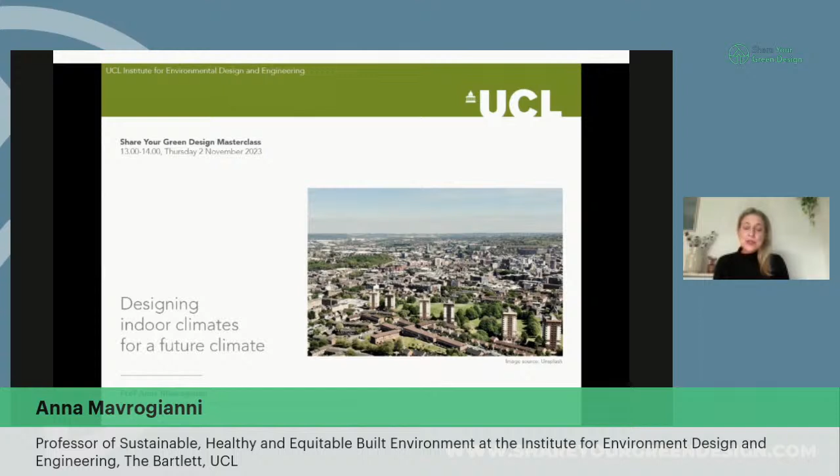So what I'd like to talk about today is how do we optimize our designs of indoor climates for a future climate in the context of the climate crisis, but also increased awareness about the health and well-being impacts of indoor air pollution. So next slide, please.

Thank you. So as many of our listeners probably know, there is growing concern about the negative impacts of both indoor overheating and poor air quality in buildings across building stocks around the world, including in temperate climates such as the UK. So it is a nationwide growing problem that can have adverse effects for health, well-being, comfort, productivity, and in particular with regards to overheating, it can render buildings uninhabitable during summer months.

It affects different actors in society. It affects the construction industry, building designers, retrofit providers, contractors, businesses. It can cause a lot of disruption in terms of how habitable the indoor environments are and how several businesses operate. Social housing stocks might be particularly affected, social landlords. Of course, it poses a significant burden on the health and social care sector, which, as we know, are already negatively affected post-COVID-19 pandemic. It also has impacts for building owners, occupiers, renters, and most importantly, it will affect disproportionately the most vulnerable in society.

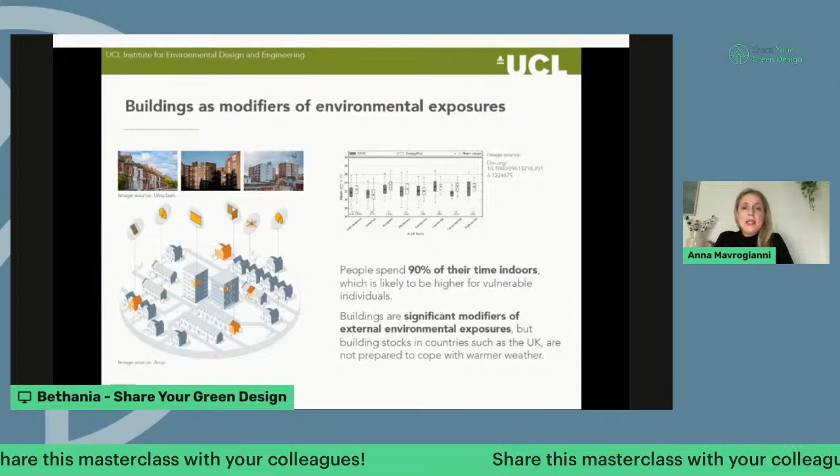So why do we care about indoor environments? Well, it is estimated that in climates such as the UK, temperate or heating-dominated climates, people spend 90% of their time indoors. So quite a significant part of our day is spent within homes, workplaces, learning environments, retail spaces, etc. And this is likely to be much higher for vulnerable individuals, people who have a limited mobility, for example,

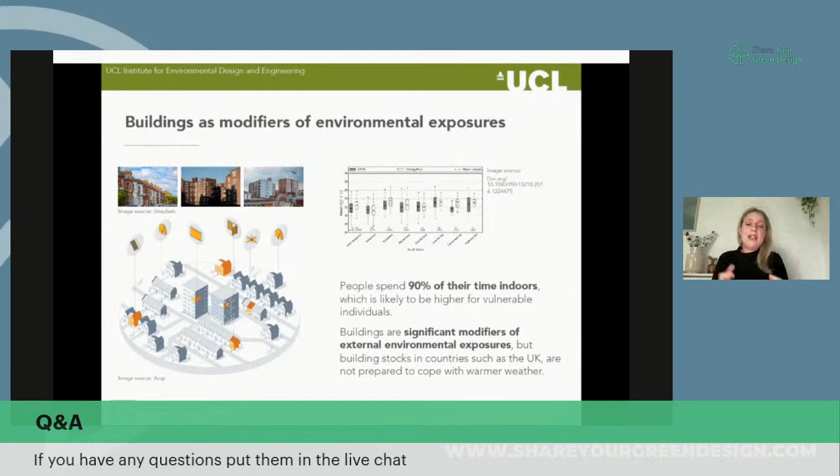or are socially isolated. And what we do know, as the diagram at the top shows, is that every building envelope will modify exposures to a series of environmental variables: temperature, humidity, air pollution, light, etc. So building envelopes function as filters, if you like, as modifiers of those environmental exposures. And then on the other hand, we also have a series of environmental quality factors, such as heat or internal heat gains or air pollutants generated indoors. So a lot of the work we do is about really the balance between internally generated and externally generated environmental factors, and how the buildings act as modifiers of the associated exposures.

Importantly, building stocks in countries such as the UK are not prepared to cope with warmer weather, so they have essentially been designed for a fixed climate, for very different climatic conditions, and in many ways are maladapted to warmer weather. And of course, this is very problematic because, as we know, our climate is changing and they need to be resilient for a wide range of climatic conditions, whilst at the same time promoting high indoor environmental quality, so low levels of indoor air pollutants, sufficient access to daylight, etc.

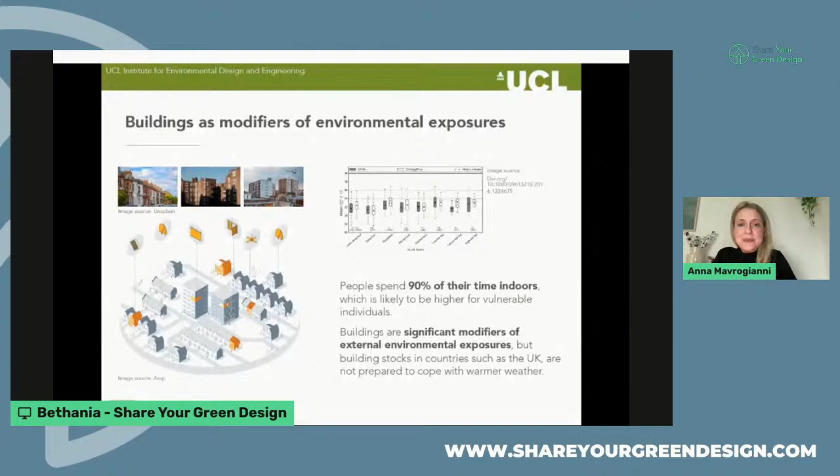So why is this important? So this is a paper led by my colleague, Dr. Giorgos Petrou, that we published a while ago in the BMJ on net zero current energy efficiency targets and what this means for indoor air. And this paper really highlights the need we have to monitor indoor air, to understand a little bit more what those existing net zero targets mean for our indoor environments.

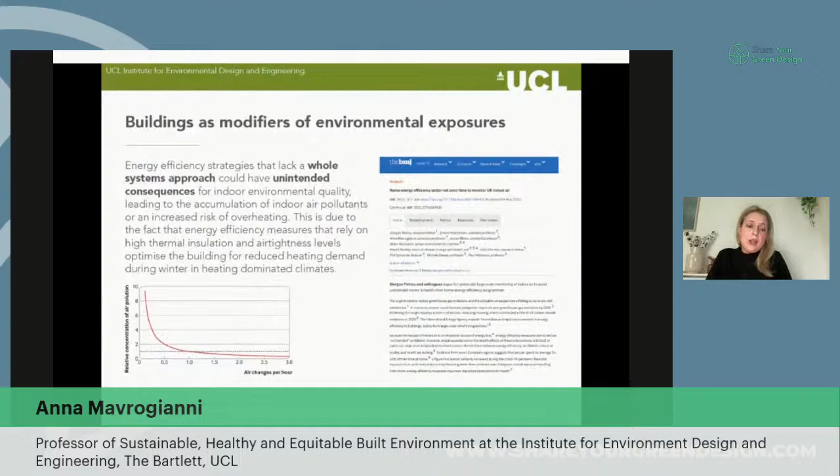So I would like to clarify that there is an imperative to reduce the space heating needs and associated carbon emissions from our building stock in a heating-dominated climate such as the UK and elsewhere. And this is absolutely fundamental in the context of climate change mitigation strategies. However, single-focus policies can have unintended consequences. So energy efficiency strategies that don't adopt a whole systems approach can be detrimental for indoor environmental quality.

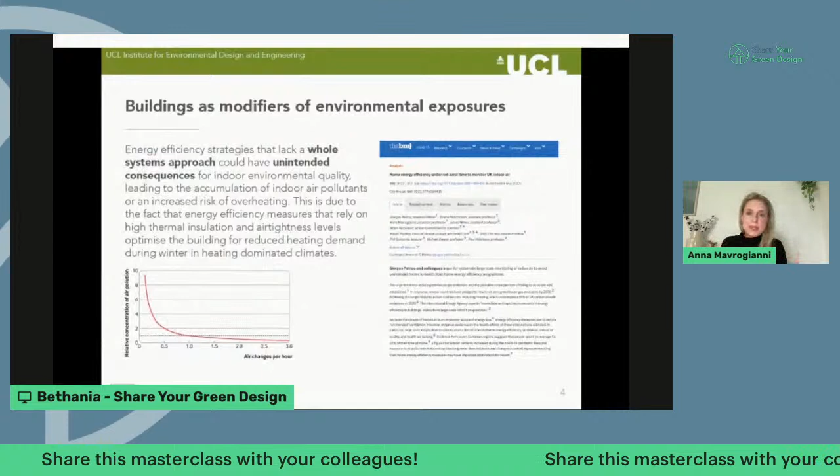And an example of this is increasing the building fabric airtightness or insulation levels of building stocks without simultaneously thinking about ventilation rates, strategies, or summer thermal performance, passive cooling strategies, and so on. So energy efficiency measures, trying to achieve those net zero targets by relying on high thermal insulation and airtightness levels, but without thinking about year-round performance or indoor air quality, can be quite problematic.

And the diagram at the bottom visually illustrates the relationship between air changes in a building and pollutant concentration indoors. And I think the issue there is that previously we had quite a leaky and not very airtight building stock, we had those unintended air change pathways. So indoor air quality relied in some ways on those unintended air change pathways, but these will be diminished as we make our buildings more airtight.

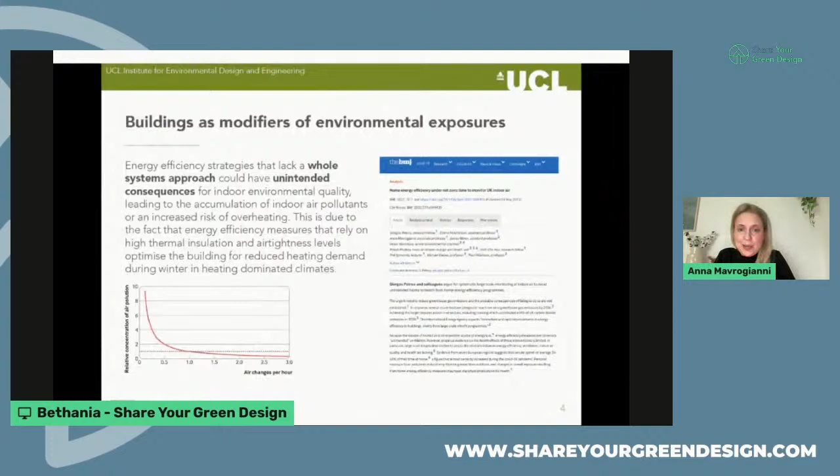So what does this mean? We might be protected from the ingress of external pollutants possibly, but if we have high levels of internally generated pollutants or heat generated indoors, these will be trapped inside the building and therefore increase the exposure of the occupants to both heat and pollutants. And this can possibly have adverse health effects. So this is very much the balance that we're interested in, again, in the context of net zero and a changing climate. Next slide, please.

So what are the causes of poor indoor environmental quality? I think I've already mentioned a few of them, but I'll just go through that list because it has been described by colleagues as a kind of toxic cocktail, a perfect storm of interacting factors. Next slide.

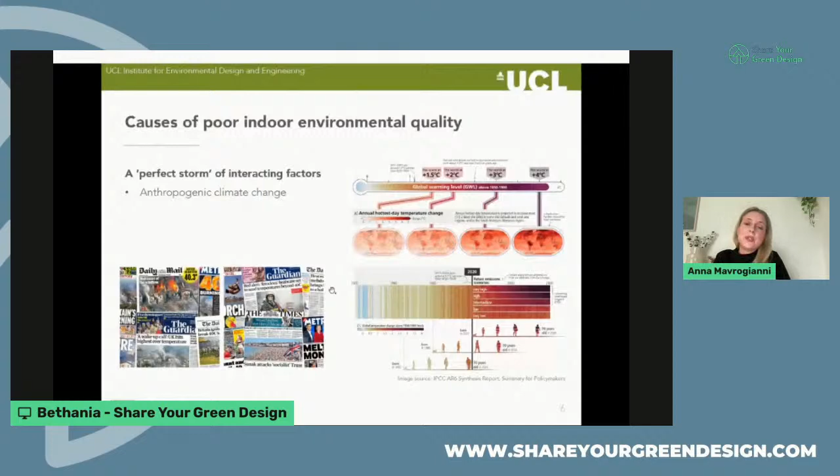It has been estimated that summer heat waves of the magnitude of the 2003 heat wave, which also caused lots of deaths, excess deaths, and economic losses, this type of event will have become common by the 2050s, by the middle of the century. Next slide, please.

At the same time, in urban environments, those background warming effects will be exacerbated by urbanization trends and urban heat island effects. Urban heat island intensity is defined as the differential between core urban and rural areas. And it's the effect of inadvertent local climate modification due to the urban morphology and also anthropogenic heat produced through various activities, buildings, industry, etc.

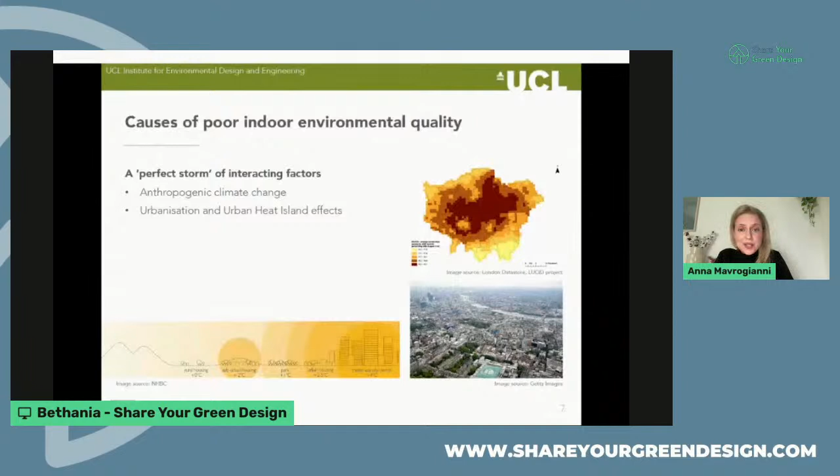So these existing overheating risks that are induced by climate change can potentially be magnified by heat island effects in cities around the world. Next slide, please. And then at the same time, when we look at the building sector, we have, again, another combination of potential risk factors, contributors to poor indoor environmental quality.

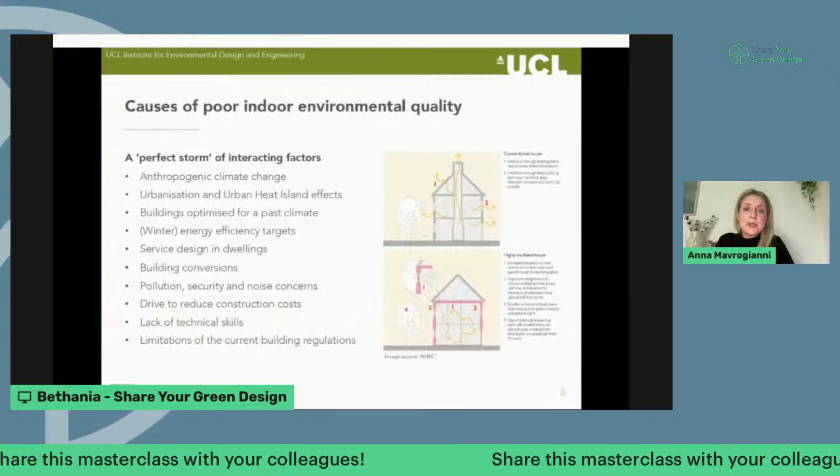So as I said earlier, our buildings tend to be optimized for past climate. In the UK, buildings, in particular homes, they were designed in such a way that maximized the absorption of solar heat gains. So lack of shading, lack of more effective cooling solutions, etc.

At the same time, to mitigate climate change and meet those net zero targets, we are setting winter energy efficiency targets. And the reason why I'm putting winter in parentheses there is that we tend to speak a lot about energy efficiency, but we always refer to winter energy performance of buildings. However, if we see an increased uptake of air conditioning or other active cooling systems in the future, then we will have to talk about

summer energy efficiency. So overheating is not only a thermal comfort issue, it should really be seen as an energy issue as well, because it will have to be dealt with potentially through active systems in the future. So a lot of focus on winter energy efficiency targets, and perhaps less emphasis on summer thermal performance of buildings.

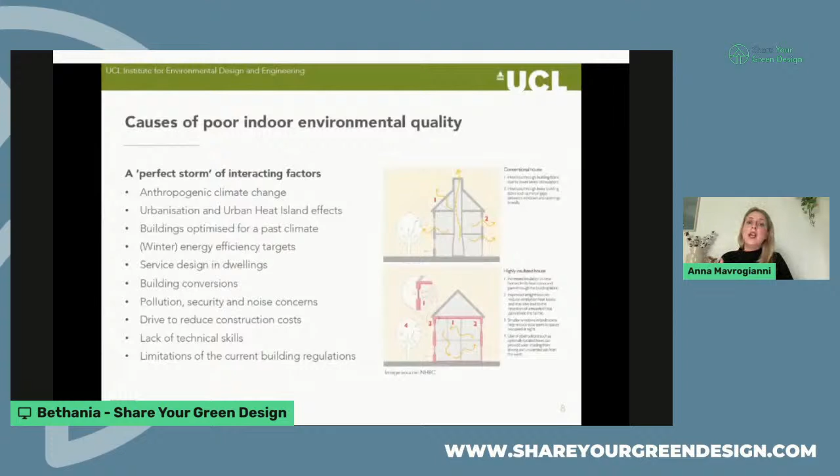The service design in dwellings, the fact that in many cases we're shifting away from the paradigm of naturally ventilated buildings with some active heating in winter, moving towards more engineered buildings, for example, the introduction of MVHR, etc. So this leads to very different environments, and quite often occupants are not necessarily prepared to operate in those different environments. They don't necessarily have the information, the education in order to change their habits, the ways they inhabit those buildings and operate them in an optimum way.

In some cases, building conversions can be a problem as well. I'm currently part of a project led by the Bartlett School of Planning, where we're looking at the impact of deregulation on performance of housing. So residential settings that are in buildings that have been converted from other functions, such as they might have been previously offices or warehouses or workplaces, etc.

So these buildings were not initially designed for residential use, and this might have some repercussions when that conversion occurs. For example, they might have high levels of glazing, etc. They might be located close to a very busy road. So what are the impacts of increasing the number of converted buildings in the stock for indoor environmental quality?

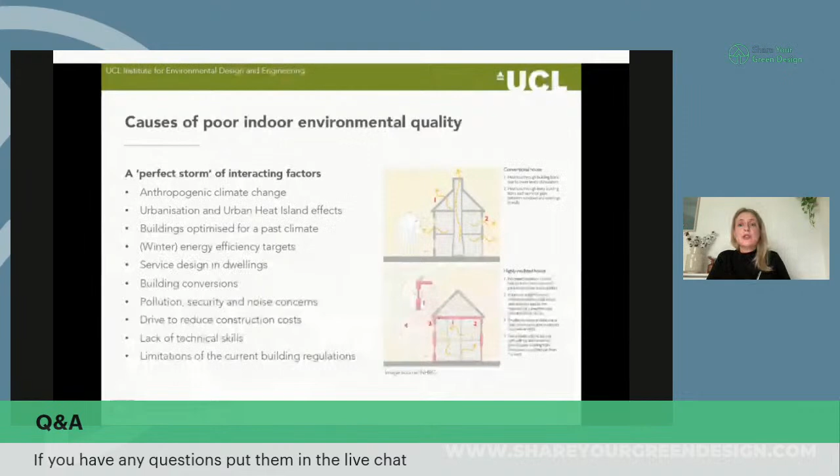In urban settings, again, naturally ventilated buildings, or relying a lot on natural ventilation for cooling purposes, might have some limitations because again, there might be concerns about pollution, security, noise. So a lot of those strategies that we typically suggest, they might not be feasible in these environments.

Safety might be another concern when you're in a high-rise building, and this can counteract with a high urban heat island intensity. So where you need cooling or ventilation the most might be where you might have all those additional barriers. At the same time, there's always a drive to reduce construction costs, and additional nice to have elements such as shading might not be included in the final design.

Lack of technical skills in the market, it has been pointed out by many colleagues that we need upskilling in order to achieve net zero energy retrofit. And to some extent, the limitations of the current regulatory framework. So we had Part O introduced a while ago, but unfortunately it doesn't cover all building types. So it's a great starting point, but we need to have additional building regulations covering the mitigation of overheating risk.

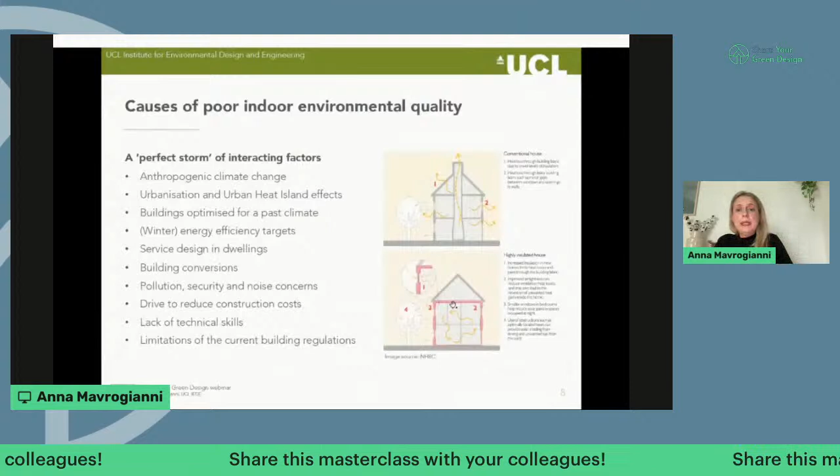And just to say there, the graph on the right shows a conventional house that relied on those unintended uncontrolled air change paths, and then a more recently highly insulated, highly airtight building, and you can see that the pathways of airflow are very different. So we really need to build tight but also ventilate right. Next slide, please.

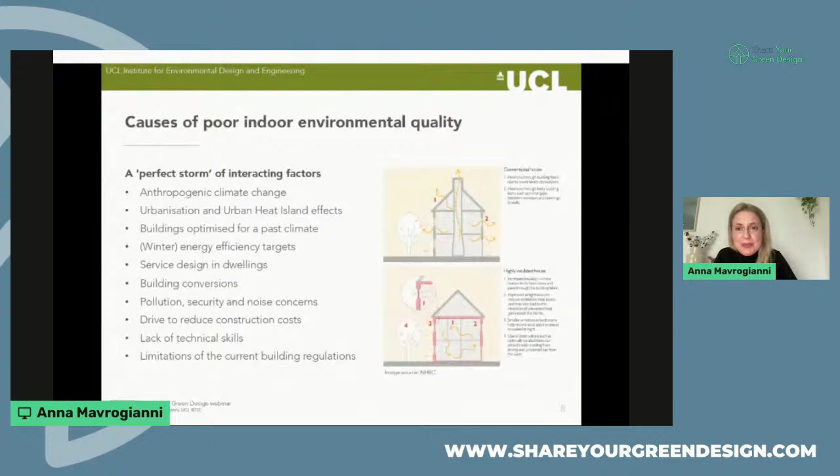And last but not least, there is also the social and cultural lack of knowledge about heat and also air quality. And again, this is something that has been pointed out by colleagues, social scientists who work in this area of risk communication, and also policymakers.

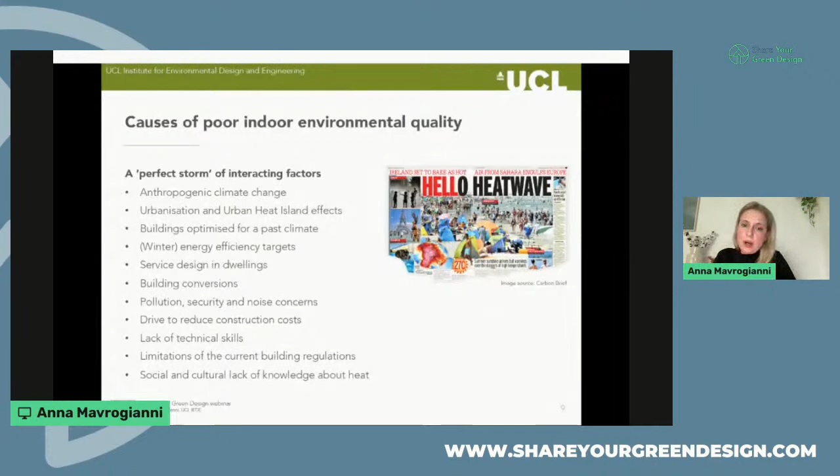That there is a lot of scaremongering, if you like, sometimes in the news. You see headlines about the risks of, say, an upcoming heat wave, but these headlines are usually accompanied by images of a very nice beach with happy people smiling, having picnics, etc. So that doesn't really help in terms of increasing awareness about the risks associated with heat exposure.

So I still think there is a lot of work to be done in understanding the best ways for risk communication, in particular when it comes to protecting the most vulnerable in society.

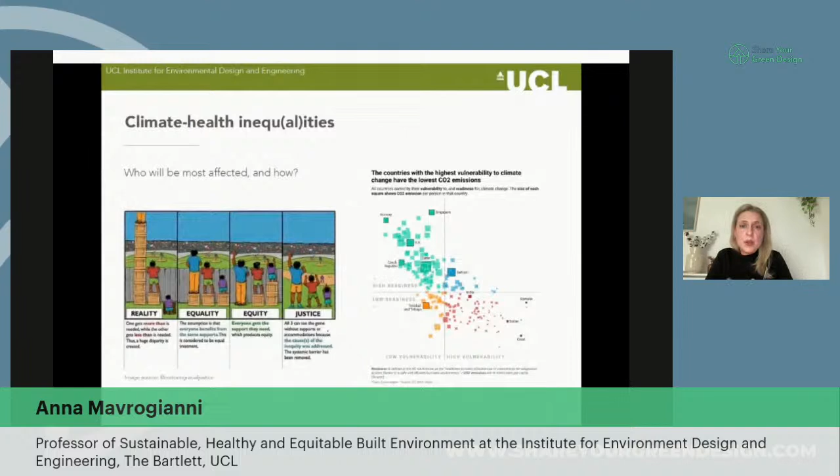And the graph there on the right is quite powerful, I think, showing the countries with the highest vulnerability to climate change having the lowest CO2 emissions. So, as we often say, countries or population groups contributing the least to climate change are disproportionately affected or not sufficiently prepared to cope and recover from climate events.

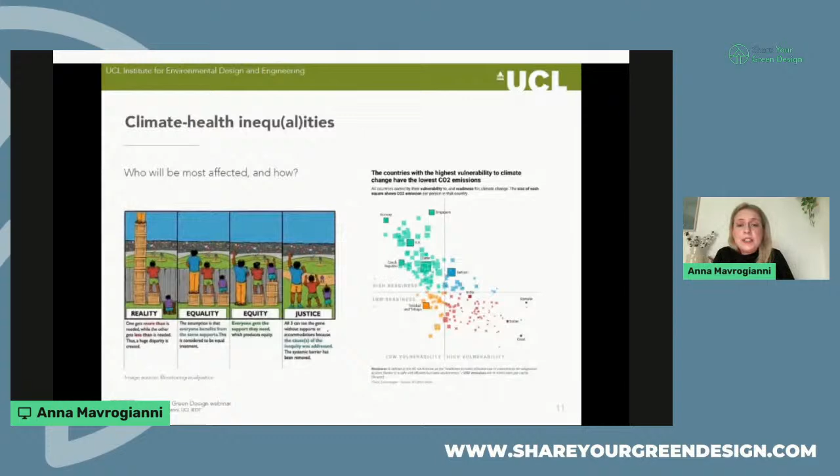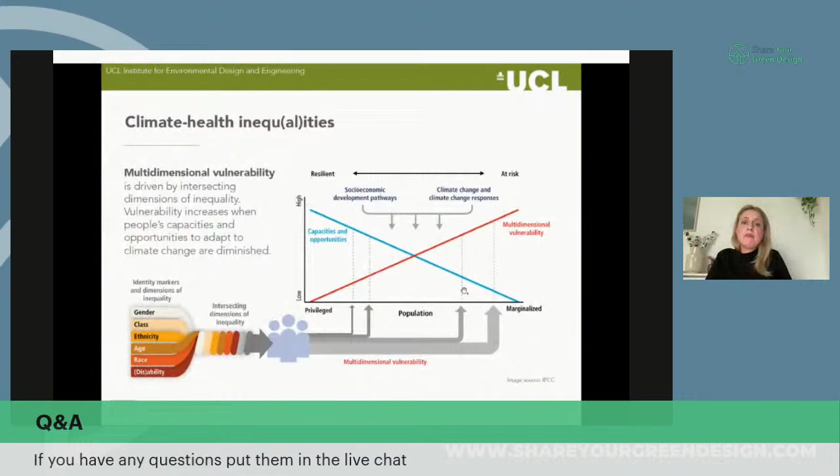So that really led to an increase in my own personal interest in the role of vulnerability and the role of the built environment in perpetuating or creating inequities and inequalities with regards to climate change and health, as well as other environmental exposures such as air pollution. So this is a graph from an IPCC report, and I think it very nicely illustrates the different dimensions of inequality, and how they can interact and intersect to affect people's vulnerability to climate change, and how this relates to capacities and opportunities.

So multidimensional vulnerability is driven by intersecting dimensions of inequality, and this could include gender, class, ethnicity, age, race, disability, but there might also be temporary types of vulnerability, such as being pregnant. And vulnerability increases when people's capacities and opportunities to adapt to climate change are diminished.

And just to say that during the pandemic, we also saw a lot of parallels between climate risk and risk to COVID. And again, the pandemic really shed light on how systemic inequalities can increase somebody's risk of poor health.

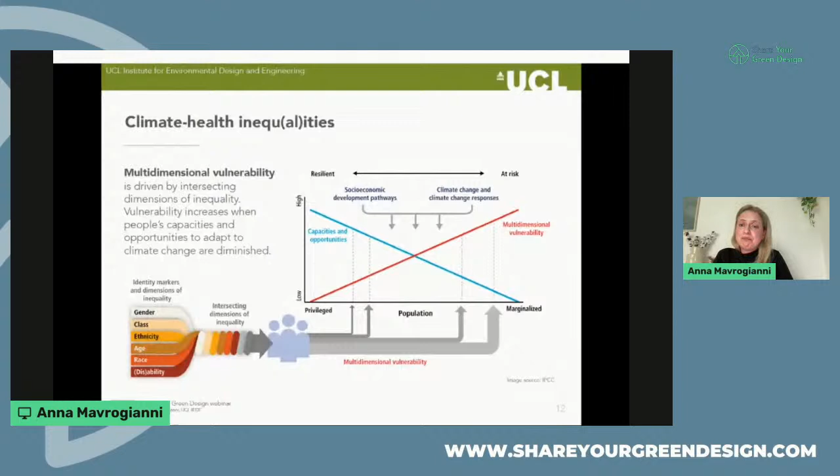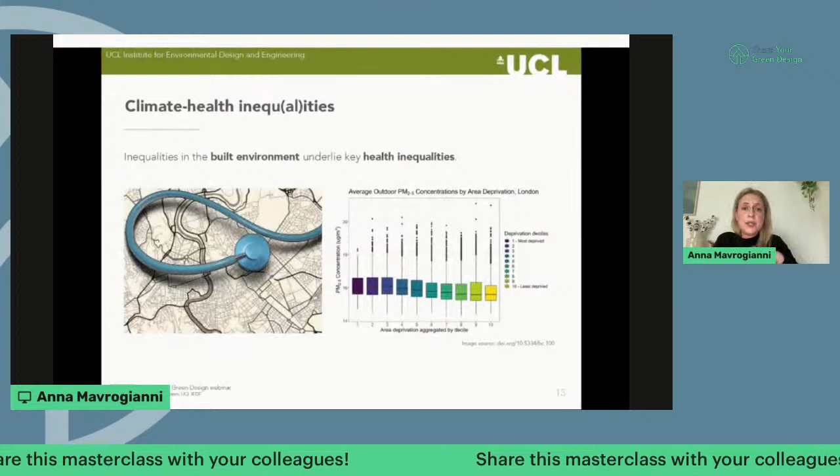So I think it's really important to map those exposures and overlay them with information about socioeconomic characteristics, adaptive capacity, etc., but also built environment characteristics, because our buildings, as I was saying earlier, are modifiers of those exposures. So they play a very significant role in determining those health impacts. Next slide, please.

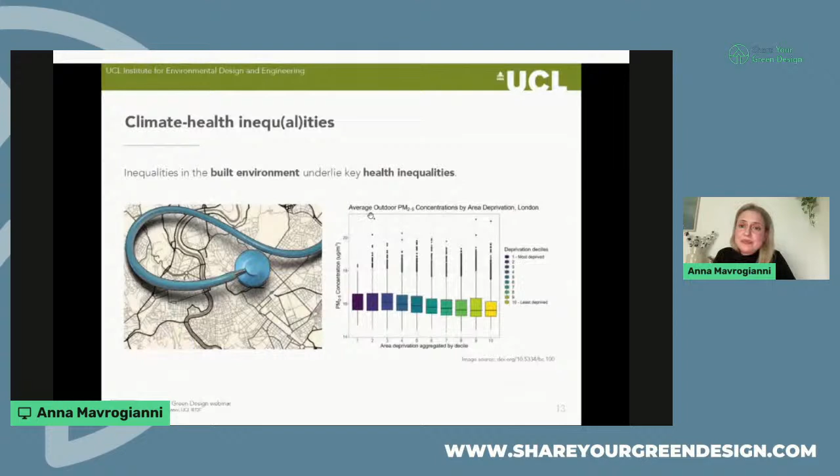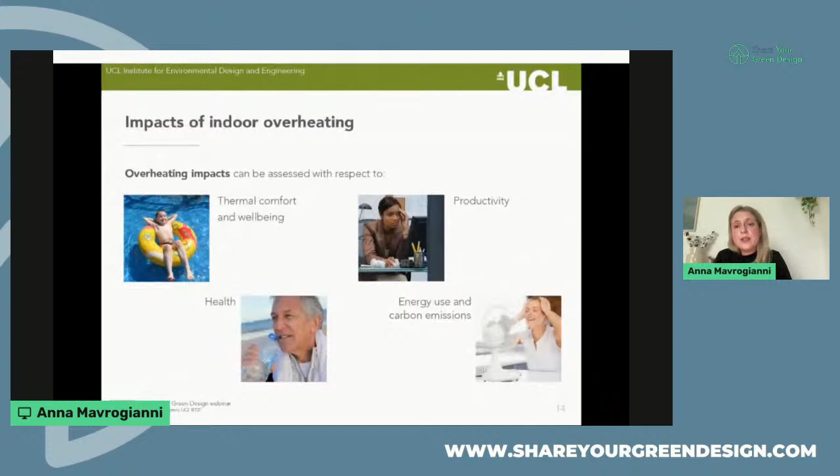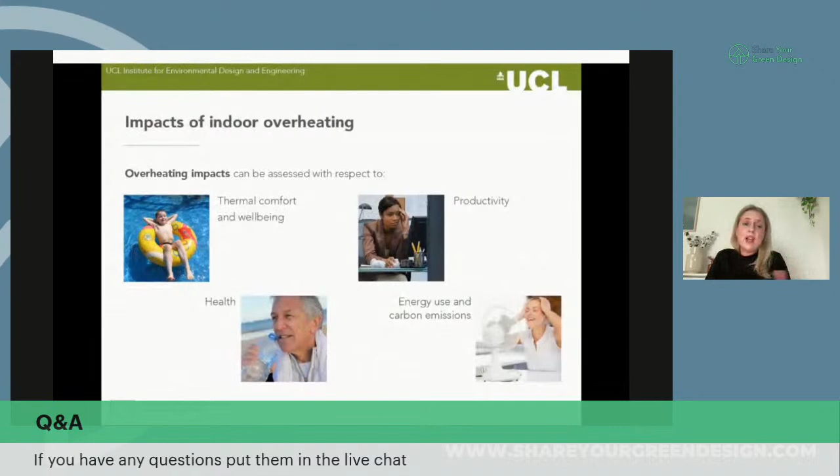So impacts of indoor overheating, briefly, the impacts of overheating can be assessed with respect to a number of factors. So these include thermal comfort and well-being, productivity, and this can include work productivity. We know that overheating could potentially lead to poor sleep and subsequently possibly accidents. Health impacts, including morbidity and mortality, but also, as I was saying earlier, energy use and carbon emissions, especially when high levels of overheating risk lead to the adoption of active cooling systems such as air conditioning. Next slide, please.

But thermal discomfort is a negative impact in its own right. So over prolonged periods, as I said earlier, it can lead to more serious health impacts, but it can also cause indirectly sleep loss, so poor sleep quality or a reduction in sleep duration, and that can lead indirectly to additional health impacts or reduction in cognitive performance and so on.

So for an individual, thermal comfort depends on a number of factors, and this can be physical, temperature, airspeed, humidity, behavioral factors such as our metabolic activity levels or our clothing levels, psychological factors, levels of acclimatization or thermal comfort expectations, and importantly, social factors such as social norms, everyday habits, practices.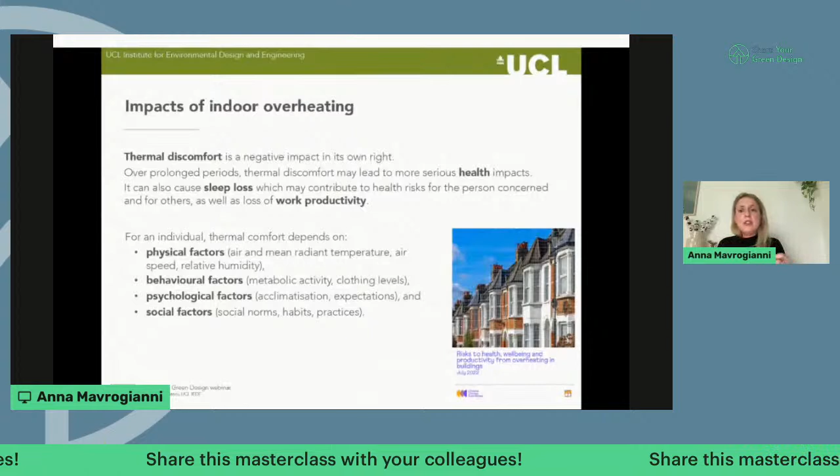And I think this is where some of the dangers lie when you have a previously heating-dominated climate society where people are not necessarily prepared. They don't have the social norms or the habits, or they don't necessarily intuitively know what's best in terms of reducing their heat exposure during a heat event. Next slide, please.

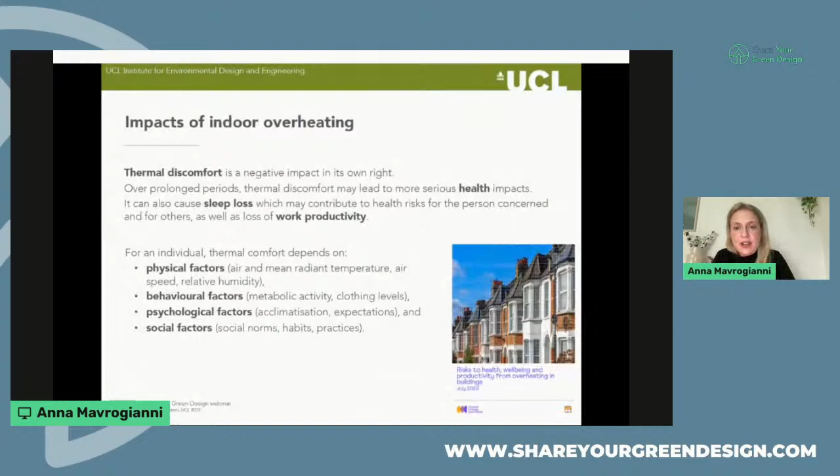So it's really important that, of course, we mitigate climate change through existing net zero targets, but at the same time, climate change mitigation is combined with climate change adaptation and resilience. Because maladaptation to a warming climate, for example, through the uncontrolled uptake of active cooling air conditioning, before having prioritized passive cooling measures, can lead to the uncontrolled increase of carbon emissions and, of course, operational costs.

So in England, current estimates, I think, suggest that the uptake of domestic air conditioning is around, I've seen, between 3 and 5%, but that might have been a while ago. So it's likely to have increased. And if this is combined with aggressive air conditioning marketing, we might potentially see a very rapid uptake.

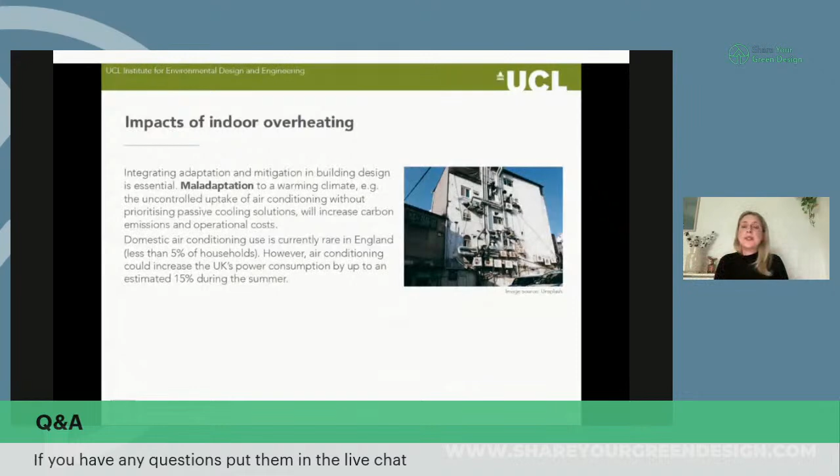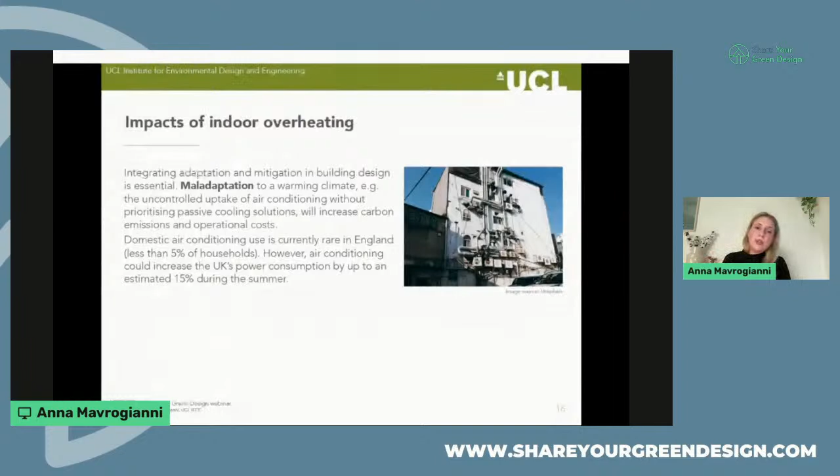And of course, active cooling systems definitely have their place, and they should be prioritized, I think, especially for vulnerable people in the context of cool rooms in a neighborhood or cool spaces. I think they're very important. But where possible, I think it's really important that we also prioritize passive cooling solutions, low carbon solutions, because these have still the potential to reduce the overall cooling loads. Next slide, please.

And why this is important? Well, because those systems also have a cost, an operational cost associated with their operation. So this is likely to potentially lead to increases in summer poverty rates. So we talk a lot about winter fuel poverty and how this could increase in the future, but summer fuel poverty is also likely to become a significant issue as our climate becomes warmer.

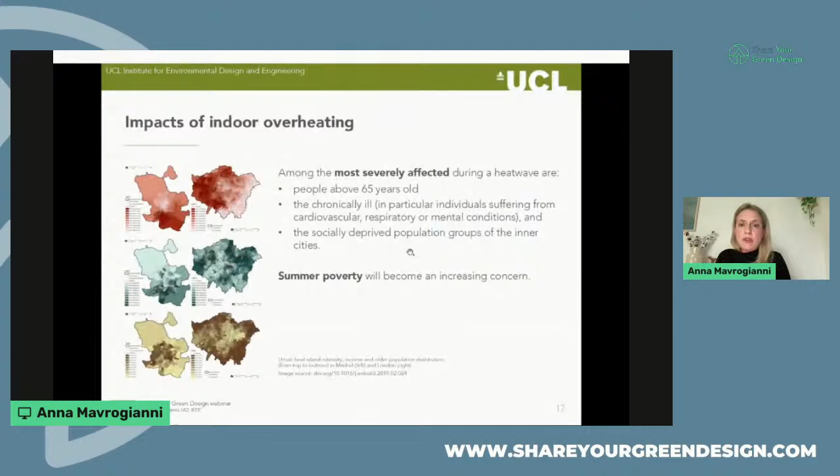So who is affected most during a heat event? So this includes people above 65 years of age. There is a very well-established relationship in epidemiological literature. People who are chronically ill, suffering from chronic conditions, and this can include cardiovascular, respiratory, or mental conditions. And importantly, socially deprived population groups in inner cities.

Social isolation can be a risk factor as well, which is why it's so important that, during a heat wave, we do look after our neighbors, especially if they're older, if we know they suffer from certain conditions, if we know that they live alone.

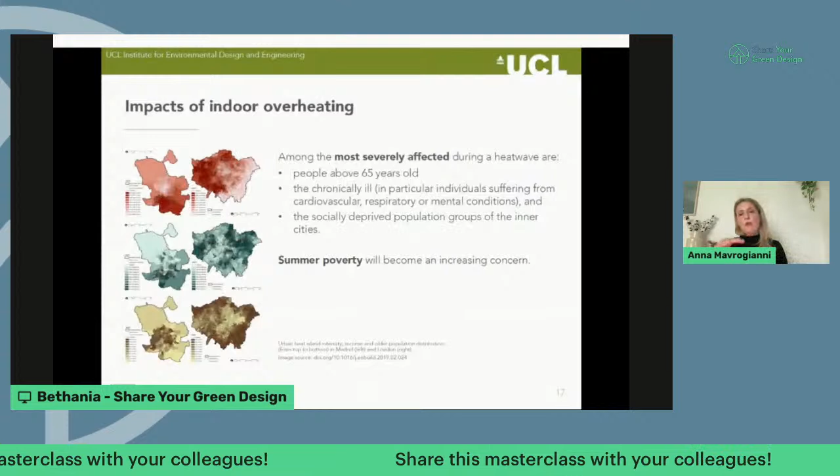And just to mention that graph there is from a very interesting study we did a few years ago in collaboration with the Technical University of Madrid, where we tried to overlay those different information layers, such as urban heat island intensity, income, the proportion of older people in a neighborhood, and also the quality of the building fabric.

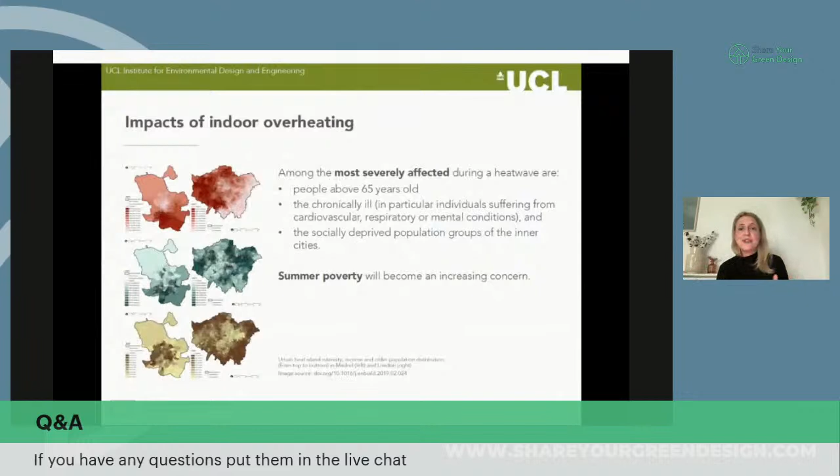That's not shown there, but we were overlaying all of these data sets, all these factors that could potentially increase somebody's vulnerability to heat, to identify the hotspots across the cities where possibly public health interventions should be prioritized. But I think what's also interesting is to see how those maps can change due to warming trends. Next slide, please.

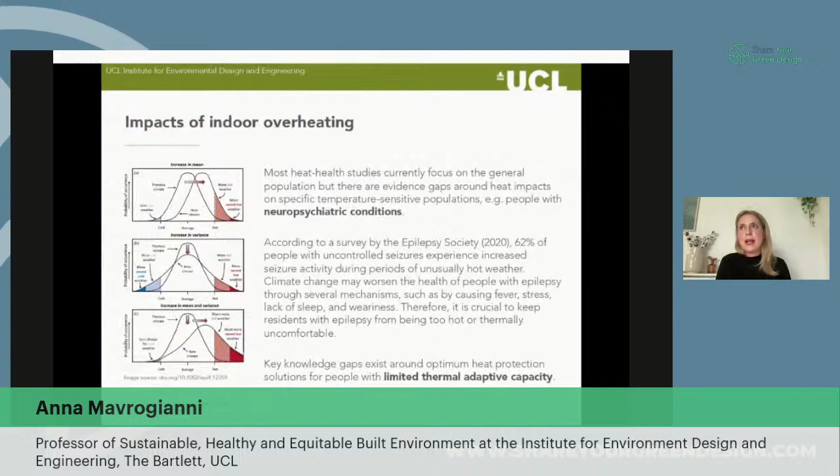Importantly, most heat health studies at the moment tend to focus on the general population. So most epidemiological literature will look at a city or an entire country to develop those heat health relationships. But at the individual level, there are also some evidence gaps around the impacts of heat on specific temperature-sensitive populations. An example of this is people with neuropsychiatric conditions.

So a few years ago, I initiated a collaboration with colleagues, neurologists at UCL, who have an interest in how people living with epilepsy can be affected by heat. So according to a survey by the Epilepsy Society, more than 60% of people with uncontrolled seizures experience an increase in seizure activity during periods of unusually hot weather.

It might be safe to assume, to hypothesize, that climate change might worsen their health and the frequency of those seizures through different mechanisms. And this again could be indirectly through lack of sleep and so on.

So there is still a lot we don't know about these relationships, and there are existing knowledge gaps, in particular with regards to whether it's the magnitude of heat exposure, of temperatures they're exposed to, or the rate of increase. So we are really starting to investigate those relationships further through a number of ongoing collaborations. But yeah, a lot of gaps in our knowledge at the moment, also around the optimum heat protection solutions for these people with limited thermal adaptive capacity.

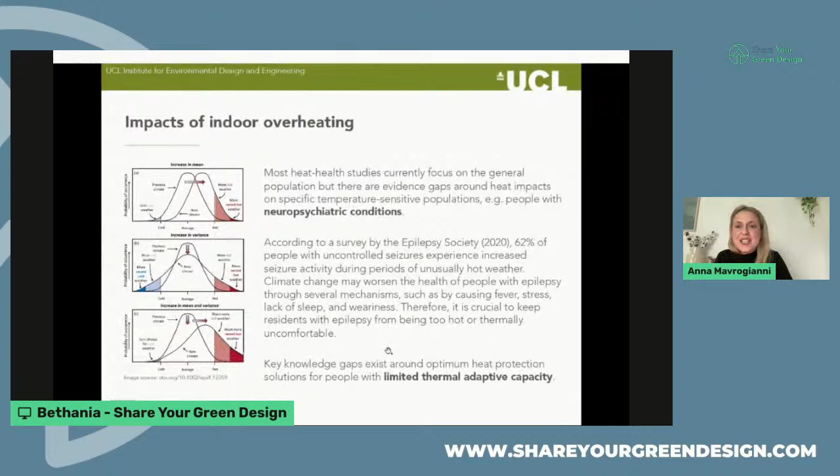Next slide, please. And in terms of indoor air pollution, I just thought I'd again briefly mention the principal pollutants that we find in indoor air that have known or probable adverse effects on health. So this could be generated from a number of daily activities at home, including cooking, combustion appliances, smoking, volatile organic compounds emitted from building materials, furnishings, cleaning, personal hygiene products. Again, a lot of this is behavior related, and a lot of knowledge gaps still exist with regards to the health impacts of our exposure to those pollutants, radon, mold, etc.

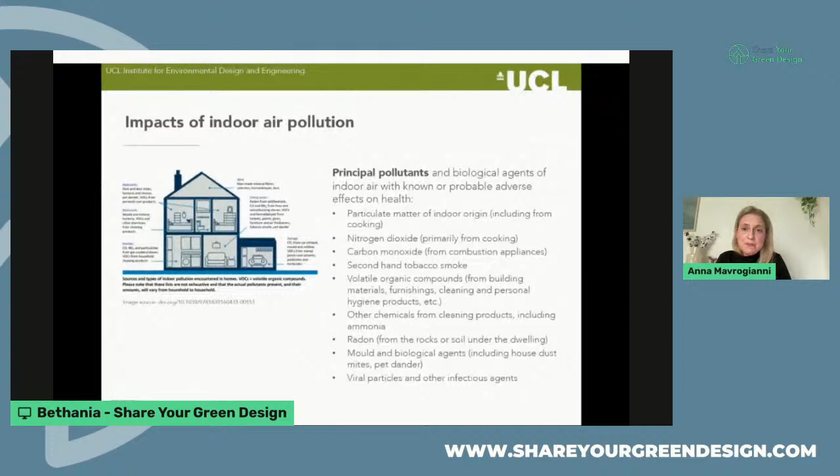Next slide, please. So I'd now like to take you through some research studies that myself and colleagues have been involved in, in a number of buildings that are or tend to be occupied by vulnerable individuals. So this includes homes, care homes, and schools. So homes: a recent study by Arup estimates that around 90% of the existing homes in the UK will overheat under a 2 degrees global warming scenario. As I was saying earlier, unfortunately, our housing stock is not well prepared to cope with warmer temperatures.

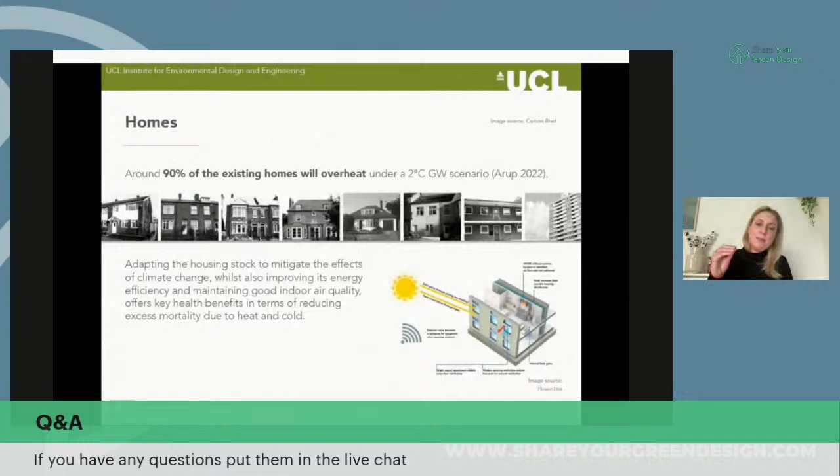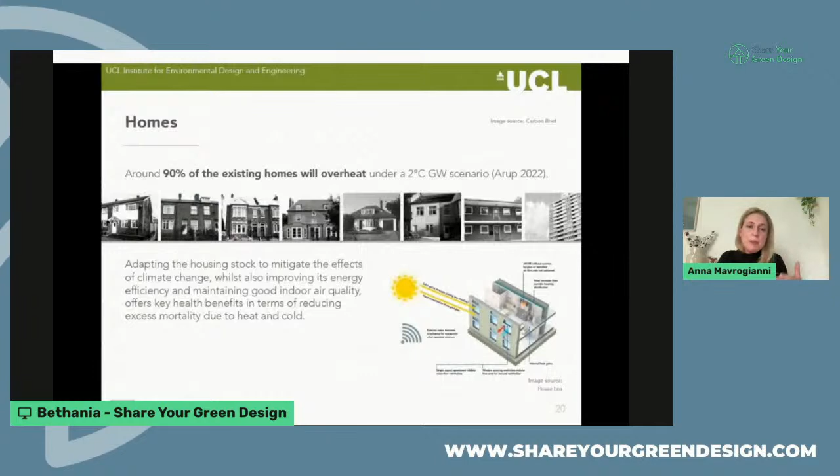And I do think that adapting the stock to mitigate the effects of climate change, so improving its energy efficiency, its airtightness, but also while maintaining good indoor air quality, can have net health benefits in terms also of reducing excess mortality due to heat and cold and reducing fuel poverty. But these need to be combined. Mitigation and adaptation need to go hand in hand. And I definitely think that insulation and airtightness shouldn't be seen as a scapegoat for poor quality or overheating. It's simply the result of holistic thinking around design, if we see those issues in newly built, more energy efficient, more airtight homes.

Next slide, please. So this is from a study we did where we used a housing stock modeling approach to simulate the housing stock in West Midlands. And we evaluated a series of energy efficiency retrofit and overheating mitigation strategies. So the graph there shows a number of interventions to the housing stock, a number of energy retrofit measures, and different ventilation strategies, but also the introduction of shutters, external shading.

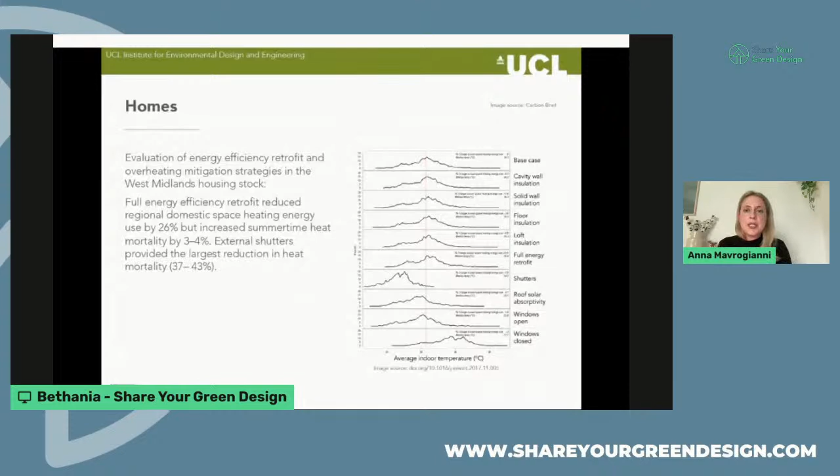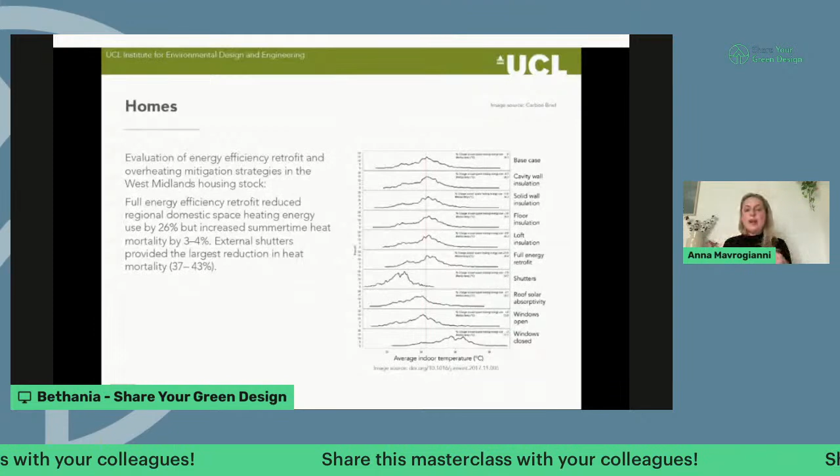So what we found was that a full energy retrofit package reduced domestic space heating quite significantly, but there was a small increase in summertime heat mortality. So because of that trapping of heat indoors, we saw a negative effect on summer heat health. However, when this was combined with external shading, shutters in particular, we saw a decrease in heat mortality. So it's really important, again, that climate change mitigation, net zero interventions are combined with climate change adaptation measures.

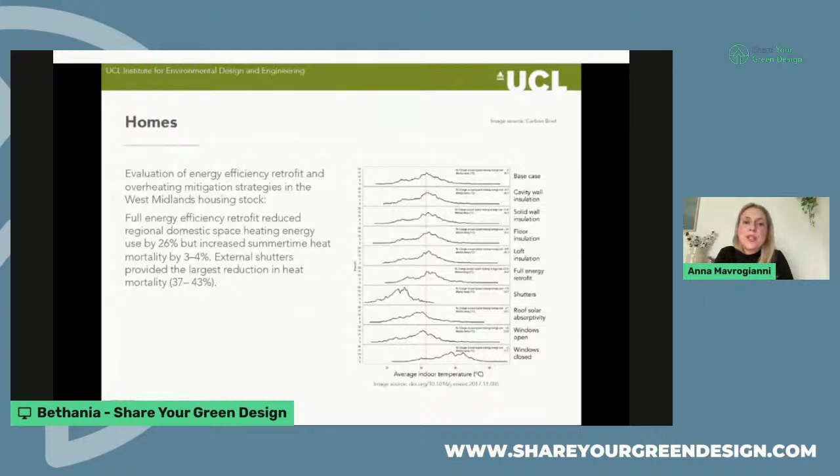Next slide, please. So this is also related to this work, and there we can see the box plots demonstrating the distributions for different scenarios. The baseline, the full retrofit, then the additional shutters on the baseline, and then the combined energy retrofit and shutters option.

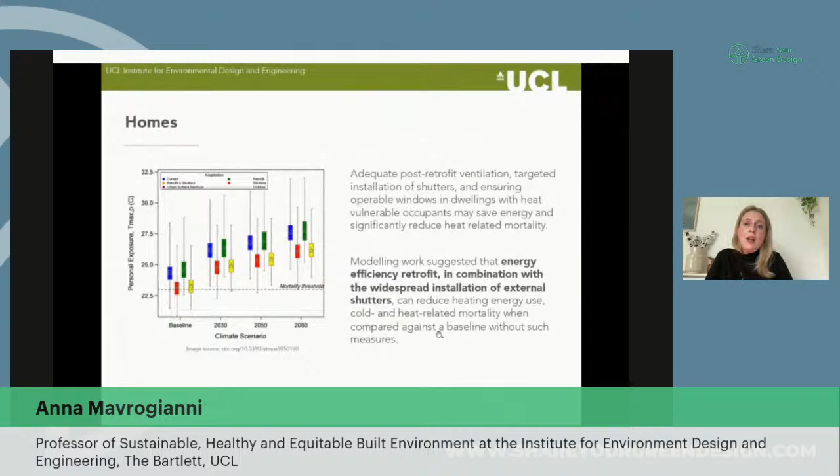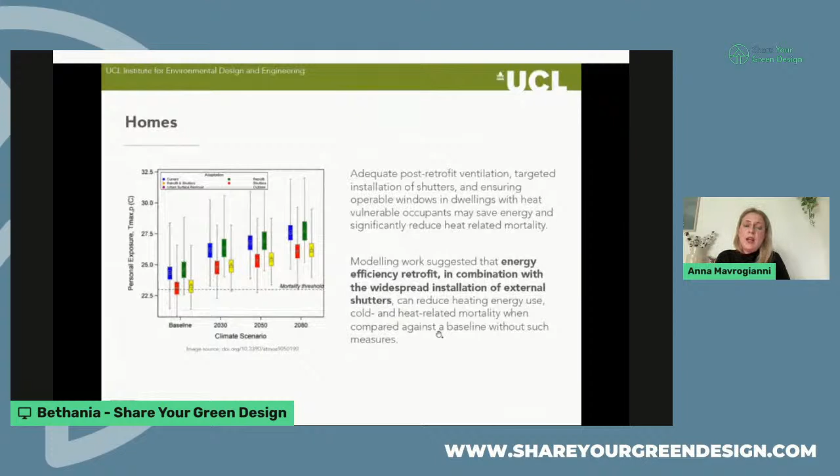So what we concluded from this study was that adequate post-retrofit ventilation, targeted installation of shutters, ensuring openable windows can save energy and at the same time reduce any adverse heat health effects in the summer. Again, I think that very clearly visualizes those relationships and how important it is to look at the whole year performance of the building stock.

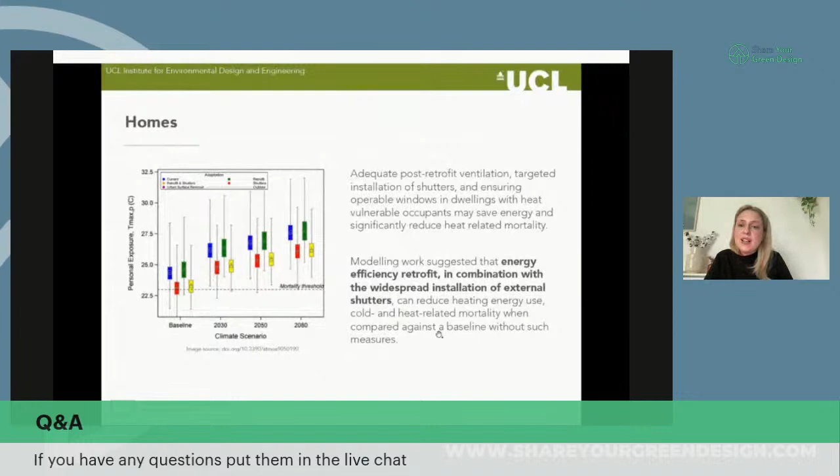Next slide, please. So this is again a housing stock modeling study where we looked at overheating as well as pollutant infiltration. So what we saw is something that corroborates the findings of previous modeling and monitoring studies in this area. Top floor flats, bungalows, newly built airtight dwellings were found to be the most vulnerable to overheating. But what I found quite interesting was that relationship between indoor air quality as a function of levels of exposure of a building to the external climate and ambient air pollution.

So in rural areas, in rural dwellings, there were higher levels of indoor pollution from outdoor sources, so essentially higher ingress of externally generated pollutants, and that is probably quite an intuitive result because you have larger, more detached homes there, so higher levels of pollutant infiltration, also as a function of wind speed and so on.

Whereas urban dwellings, where we had more flats, and those homes tended to be much more sheltered with less exposed facades, had a higher level of internally generated pollutants. So yeah, this is something to keep in mind. That again, there's no one size fits all approach. Location, the local microclimate and building type, the levels of exposure, massing orientation, all of these factors can play a very significant role on indoor environmental quality alongside any energy retrofit or other retrofit measures.

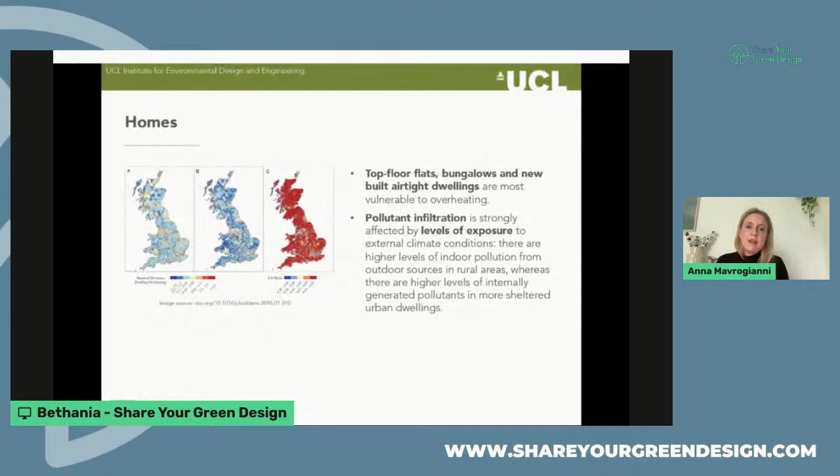So moving on now to care homes, I'm very lucky to be part of a project funded by NERC, led by Professor Mike Davies at UCL. And we identified that knowledge gap at the time, that there wasn't much data out there, or a strong evidence base on the climate resilience or overall thermal performance of care settings. And this is really important because the UK has an aging population, with lots of older people over 65 residing in care homes, and existing literature in this area has identified care settings as a place where we might see adverse health effects during heat waves.

However, at the same time, there are a number of heat management challenges in care settings, and these are quoted in the Climate Change Risk Assessment 3. So these include lack of awareness or confusion around responsibility in terms of how to manage building systems to cope with overheating. Again, similarly to homes, care homes are not well prepared to cope with extreme heat. A lot of them are converted. So lack of awareness of risks, but also lack of specific responsibilities or poor governance when it comes to heat management. Lack of existing passive or even active, in some cases, strategies.

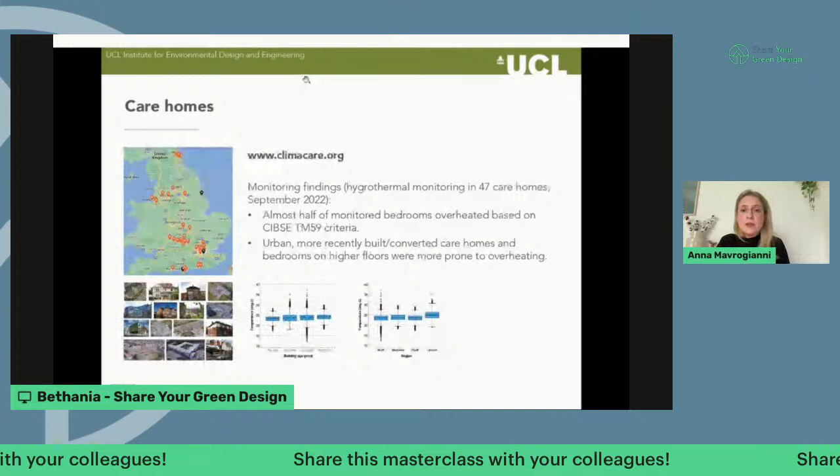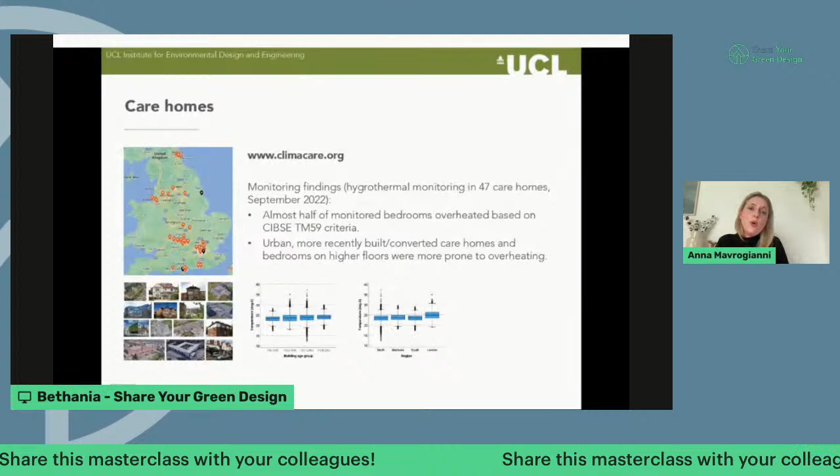So these are some results from the Climate Care project, the result of hygrothermal monitoring carried out in 47 care homes. So it was found that almost half of the monitored bedrooms overheated based on existing CIBSE TM59 criteria. And again, in some ways, resonating results that we see on overheating in housing. Urban and more recently built or converted care homes or top floor bedrooms were more prone to overheating risk.

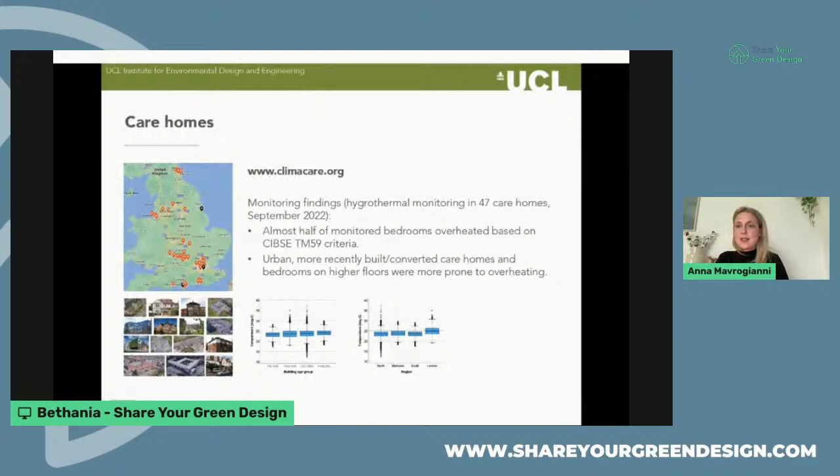And further modeling work of some of these pilot case study care homes found that a combination of passive interventions, including nighttime ventilation, might be required to maintain thermal comfort indoors. And this, as I was saying earlier, even if it doesn't fully mitigate the risk of overheating, we found that under a 2080s high emissions climate change scenario, there are some technical physical limits to the effectiveness of passive cooling strategies, but they could still either delay the need to install air conditioning or overall reduce associated cooling loads and operational costs. And I think that's really important when you have such a stretched sector, such as the social care sector, that you reduce those operational costs.

And other measures we tested were external shading, again found to be quite effective. There was an additional cost-benefit analysis study that found that those measures were still cost-effective even under scenarios assuming the shortest loss of life expectancy. And we concluded that they're still a very important complement to operational responses.

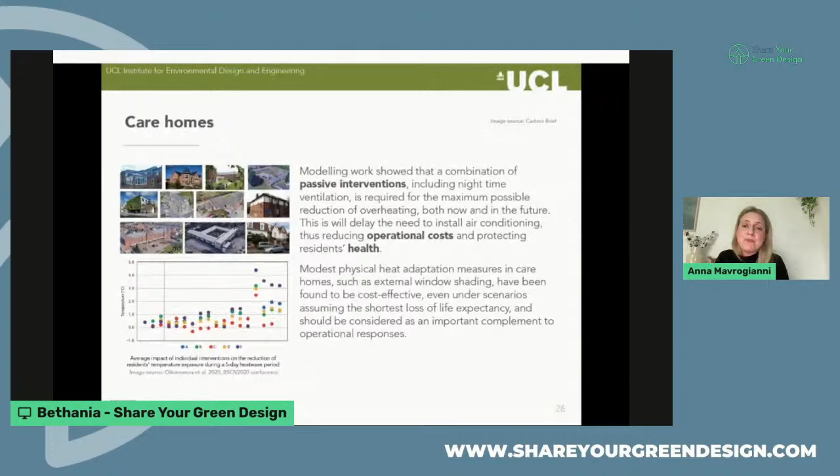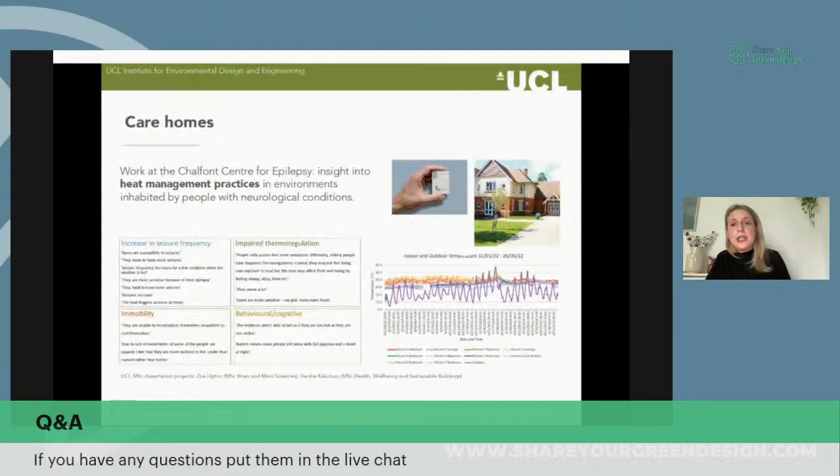So in addition to this work, as I said, I have begun that collaboration with colleagues at UCL, neurologists, and Epilepsy Society. So this is a work that two of our MSc students carried out, and included hygrothermal monitoring, a questionnaire survey of the staff, the frontline care staff, and also dynamic thermal modeling. So this really gave us insights into the heat management practices in these environments for people with neurological conditions.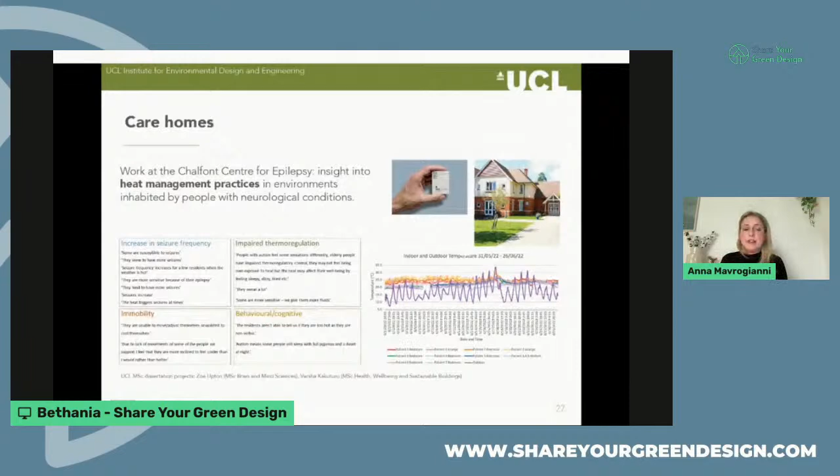So there is generally an understanding that the residents of that center tend to be much more sensitive to heat, but primarily the carers relied on natural ventilation strategies to reduce overheating indoors during a heat wave, but this was found as not effective enough. Next slide, please.

So modeling work that we did indicated that, again, night ventilation was the most effective individual strategy. But in terms of combining strategies, looking at the cumulative impact of lots of passive strategies working together, we found that a combination of shading, ventilation, more advanced glazing, and high albedo materials could be quite effective.

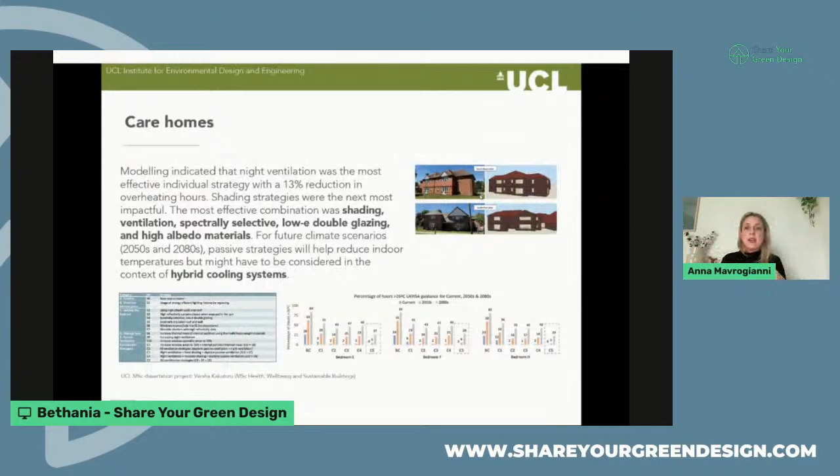Similarly to the work for the main climate care sample of care homes, we found that these strategies had limits. So for some of the future more extreme climate change scenarios, they wouldn't fully maintain indoor thermal comfort, but it could still help reduce indoor temperatures, possibly reduce the time needed to operate air conditioning systems, and they could be considered in the context of hybrid cooling systems. Next slide, please.

And last, I would like to talk about schools. So I recently led an EPSRC funded project called Aspire that looked at the climate resilience and indoor air quality in school buildings in the UK. So why do we need to study schools? Well, for a number of reasons. In the UK, they're responsible for around 15% of the country's public sector carbon emissions. Again, the energy costs are a significant part of a school's budget, so there is a significant need to reduce it.

And also, due to its unique characteristics, the school building sector presents a lot of opportunities for energy use reduction. For example, the occupancy activities that take place there, or equipment use, tend to be fairly homogeneous and easier to control. So many people suggest that it might be fairly easy to implement those retrofit changes. Next slide, please.

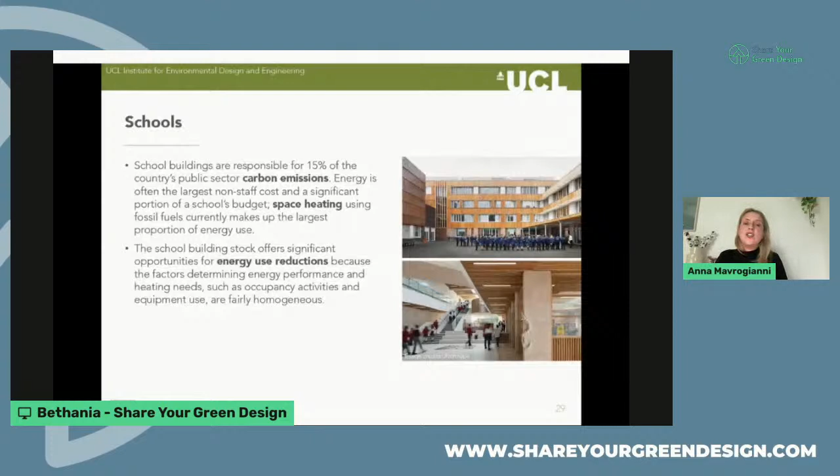And of course, at the same time, good indoor environmental quality is fundamental for learning performance. There are strong established relationships between temperature, ventilation rates, and performance. So we know that younger people, kids, have a limited ability to thermoregulate, so they can be negatively affected by high temperatures. Again, they tend to breathe more air, so the high levels of CO2 and excess temperatures can negatively affect their learning performance.

And what I think is also interesting is the inequalities dimension when we look at school building performance. It's been found that children living or attending schools near high traffic density roads in urban environments are exposed to higher levels of traffic-related pollutants. And this could potentially lead to higher prevalence of asthma or other negative health impacts.

And at the same time, schools in more deprived areas with less resources to adapt to warmer weather might face disruptions, for example, school closures during hot spells. And this could potentially lead to inequalities further down the line due to reductions in educational attainment, etc. Next slide, please.

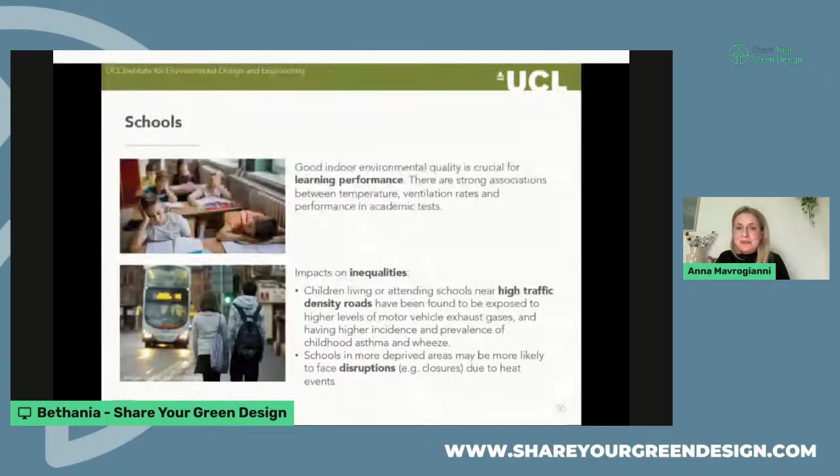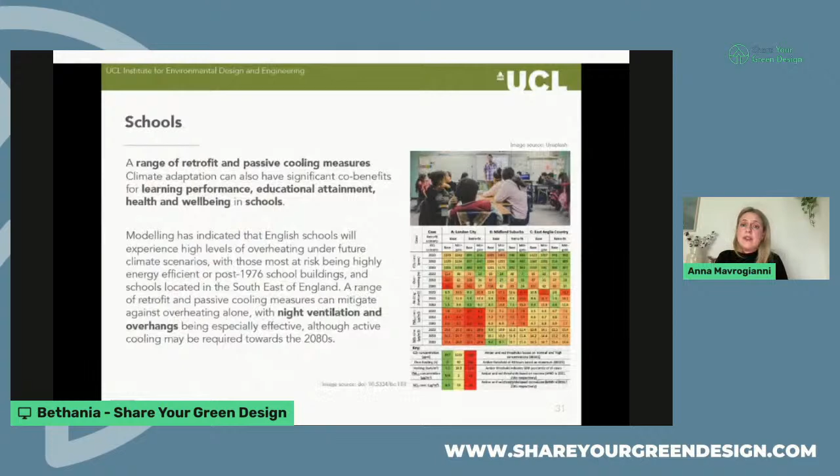So in the Aspire project, we found that a range of retrofit and passive cooling measures again can have significant co-benefits for learning performance, educational attainment, health, and well-being. I'm mindful of the time, so I'll just go through this quickly. But again, a similar pattern: night ventilation and overhangs were found to be especially effective, although again, active cooling might be required towards the 2080s or under more extreme emission scenarios. Next slide, please.

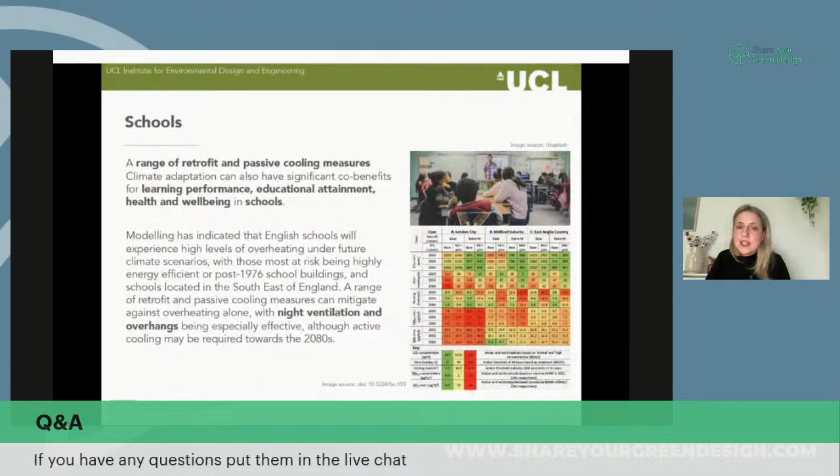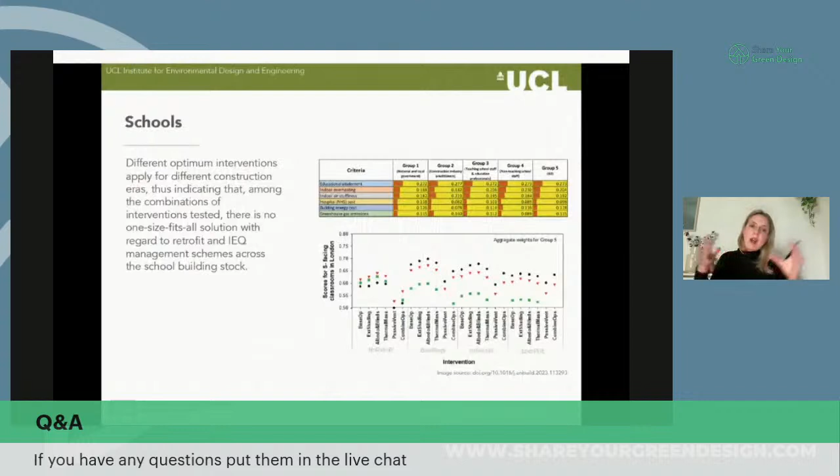And this is part of a multi-criteria decision analysis framework that was developed in the context of this project. And what we found was that stakeholder groups ranked different performance criteria differently, although there was overall agreement. Learning performance, educational attainment is the primary goal. And what we found was with the current range of interventions that we were testing, there was almost a preference for less energy efficient options, but increased ventilation rates because these were linked with higher learning performance.

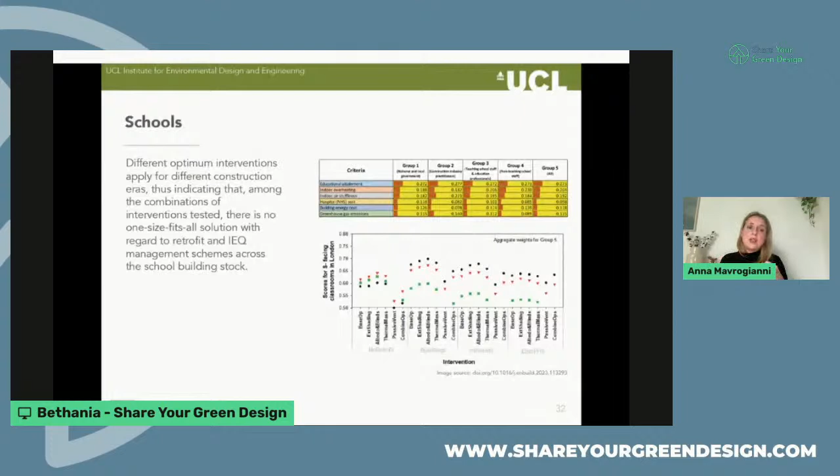Again, we only tested a limited number of scenarios, but I think it's really important that there is no one-size-fits-all solution, and energy retrofit should go hand in hand with strategies aiming to improve indoor environmental quality. Next slide.

So I'd like to just finish this talk. I can see a few questions coming there, with just a few thoughts in terms of what we should be prioritizing as built environment researchers, practitioners, decision makers. So I think that effective mitigation of risk requires increased public awareness about the importance of indoor environmental exposures. So I talked a lot about thermal comfort, overheating, air pollutants, but there are also other factors such as daylight access or noise that can have significant impacts on our health.

Development of appropriate regulatory frameworks and incentives, and the incorporation of climate resilience, both in new designs and retrofits, but also looking at the urban scale and the indoor-outdoor continuum. And importantly, a cultural shift in perceptions of heat and adaptation approaches. So there are a lot of actors that can contribute to better indoor environments and improved health and well-being, and a low zero carbon future.

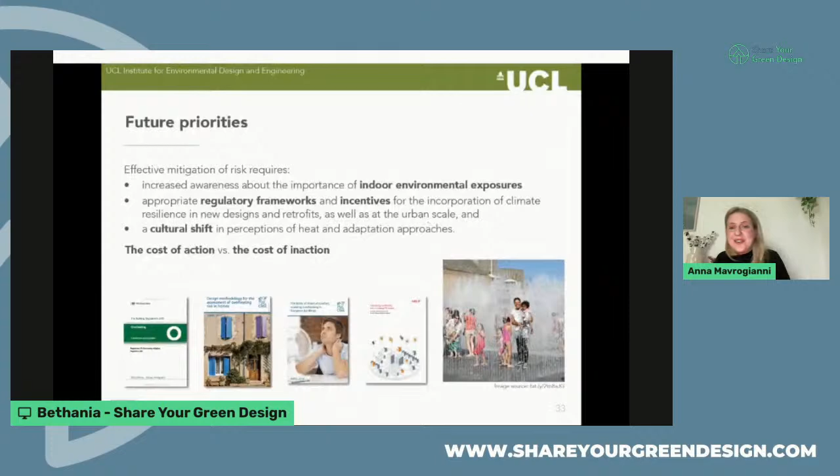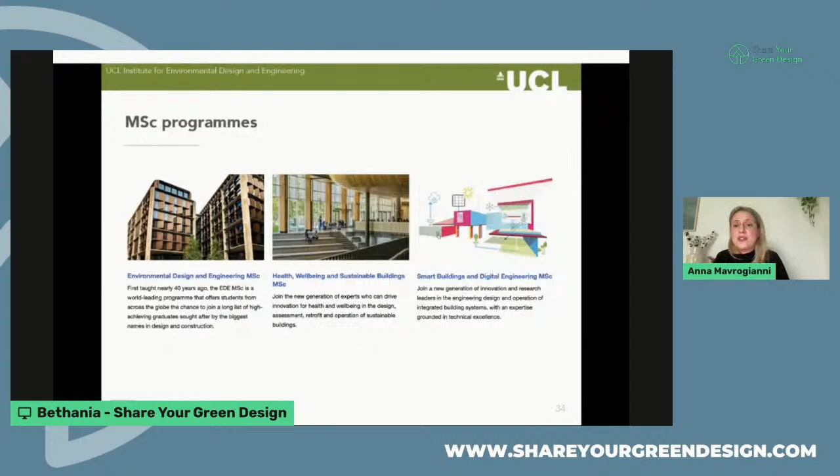And I think we have to think at this point in time about the cost of action now versus the cost of inaction. And one last slide, please. So yeah, last I would like to mention the two MSc programs I'm involved in at the UCL IEDE. So there is MSc Environmental Design and Engineering, a well-established course, a pioneering course, I would say, dealing with the reduction of carbon emissions and the creation of sustainable buildings for several decades. I'm lucky enough to be one of the graduates and now teach on the program.

Our MSc Health, Wellbeing and Sustainable Buildings, which we launched back in 2017 with Dr. Marcella Ucci, addressing the need to also look at the health and well-being dimensions of our design decisions in the built environment, and also the Smart Buildings and Digital Engineering MSc, looking at innovative solutions and novel research in this area. And I guess a common thread that runs through all of these programs is the focus on integrated and interdisciplinary design. So next slide, I think that's my last one.

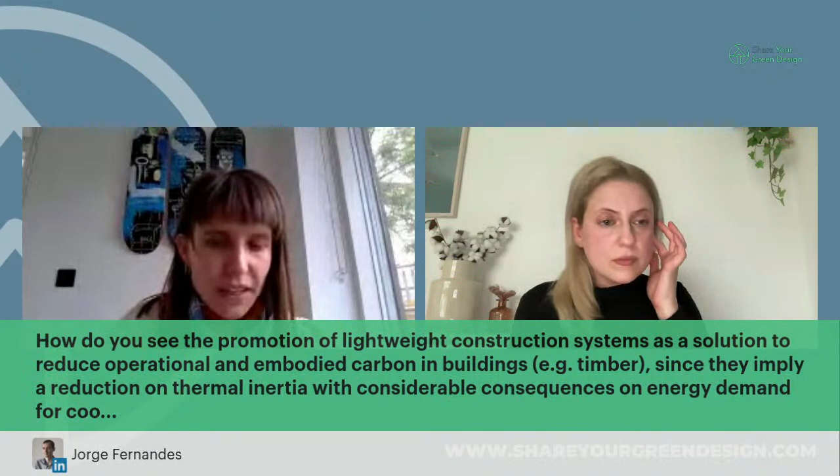How do you see the promotion of lightweight construction systems as a solution to reduce operational and embodied carbon in buildings, like timber, since they imply a reduction in thermal inertia?

...considerable consequences on energy demand for cooling, particularly in countries with warm climates? Yeah, that's an excellent question. So generally, I think we should think about the climate context before we propose any solution. So we know that thermal mass is proposed as a potential solution for cooling, but it's usually advised for hot and dry climates combined with night cooling strategies. It's really important. And again, there are implications for embodied carbon, structure considerations.

So I think there is place for lightweight construction systems, possibly for more hot and humid climate contexts. Again, this is where we need the expertise and tools such as dynamic thermal simulation, for example, to fully quantify the impacts of the different strategies. And again, I think there is more that could be done on looking, as we reduce operational energy and carbon, at the associated embodied energy and carbon of any systems, construction materials, any solutions that we propose.

Thank you. And this is one question I have. So, are you aware of any public health initiatives, maybe in London or in any other place, which are at the moment helping mitigate these issues that you were discussing related to buildings and the vulnerable populations? So there are some great initiatives by the Greater London Authority, mapping cool spaces across London. There are lots of research projects out there and funding calls.